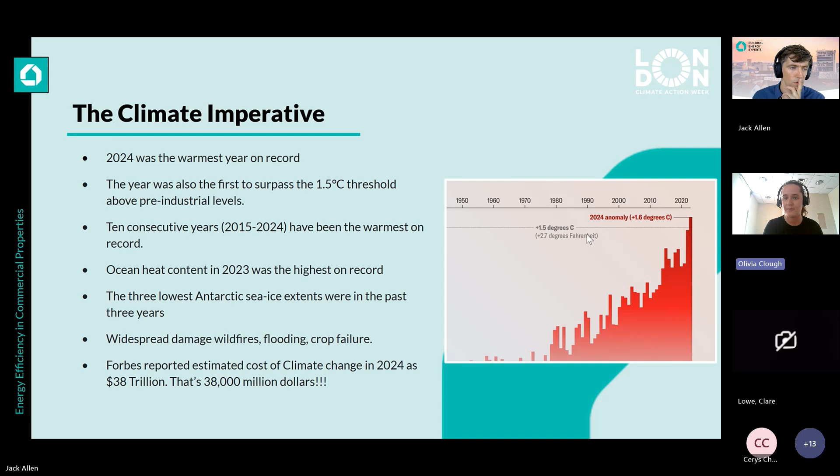Hi, Jack. Sorry to interrupt. I don't think the slides have changed on our end. If you want to just check. There we go. Oh, sorry. Got to click the buttons.

We're currently retrofitting 1 to 1.5% per year, and they're not necessarily being retrofitted to the correct energy targets. And this rate needs to reach 5% to meet the goals.

One of the key drivers, which will always be there, is regulatory compliance. The net zero emissions targets will presumably bring a lot more of these, although they have been light so far, especially as the last government were very slow to bring things in and change their mind a lot. But the minimum energy efficiency standards, which require buildings to be above an F or G, so a minimum of an E, are currently in place.

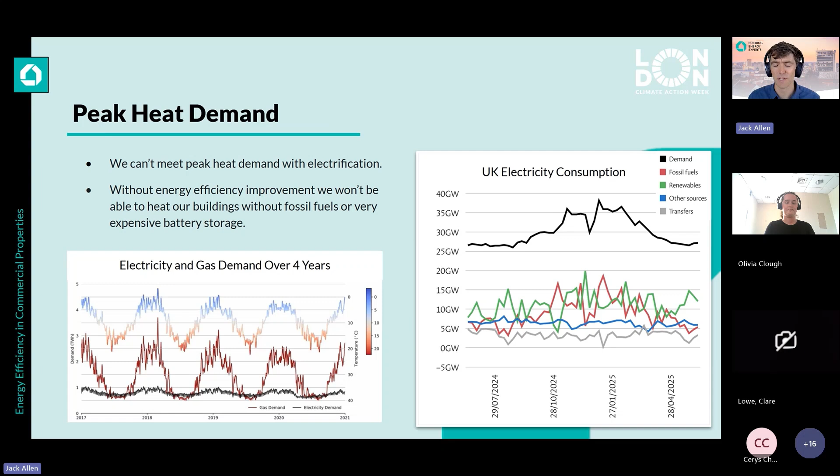Electricity, unfortunately, isn't like that, and the renewable generation doesn't follow our heating demand in any way. So without a cost prohibitive amount of battery storage, the only option with electrification is to significantly improve our energy efficiency in terms of being able to reach that peak heat demand in those cold winter months.

Apart from the practical and environmental imperatives, there's also a strong commercial case now for decarbonising buildings and making them more energy efficient. Starting with energy savings, since 2021, energy costs for businesses have gone up on an average of 90%. This translates to an overall average cost increase of 11%. With energy intensive businesses quite often working on very fine margins, this is a significant amount.

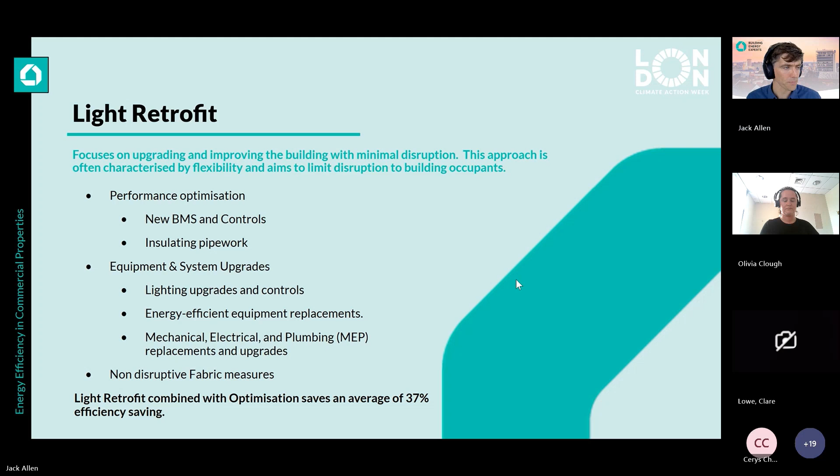Then we go on to deep retrofit. For further savings, deep retrofit is often required, particularly in older buildings with uninsulated building fabric. It involves making larger changes, such as potentially new facade, new openings, windows and doors, roof insulation, floor insulation. One key thing with deep retrofit is to consider it in line with your repairs and maintenance schedule. For instance, if the roof does need replacing because it's leaking, make sure that new roof that goes on is well insulated and has a PV array if possible. So combine it with the normal building cycle.

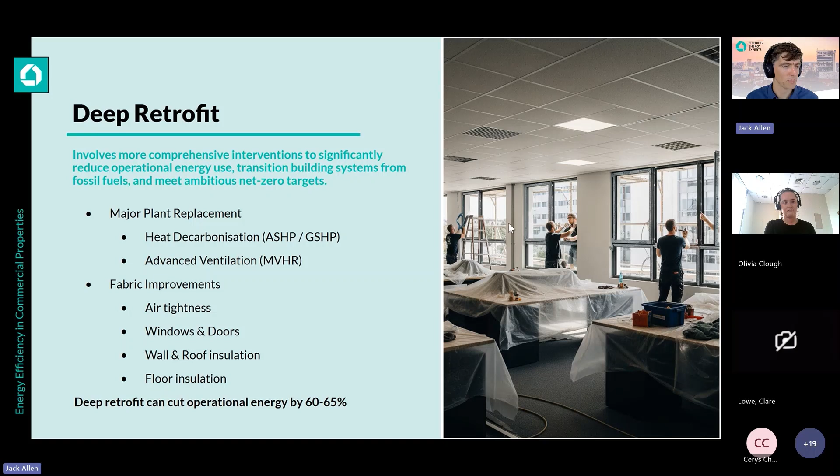The UK Green Building Council has got a good commercial guide for delivering net zero, and it sets out these 10 key considerations. It's a very good guide, and I recommend anyone downloads that or any of their other tools because they are an excellent organisation. I thought I'd add this in just because it's a great place to start. So first off, understanding the building, and that's getting a clear picture of how the building uses energy and what its current environmental impact is.

And then next up is figuring out what's needed. Do a thorough check of the building's structure, systems, and pinpoint specific areas for improvement. Then it's about building your case, thinking about how these upgrades will help with the new rules, and also if they can save you money or bring other benefits like making the building more attractive to rent.

Also knowing about the roadblocks and opportunities, being aware of potential challenges, like the split incentive, which is where landlords often pay for improvements because 85% of our building stock is rented out, and tenants typically get the benefit of those improvements. So how do you overcome that split incentive, and which part of the lease and who pays is one of the key roadblocks. So making sure that's worked out early is great.

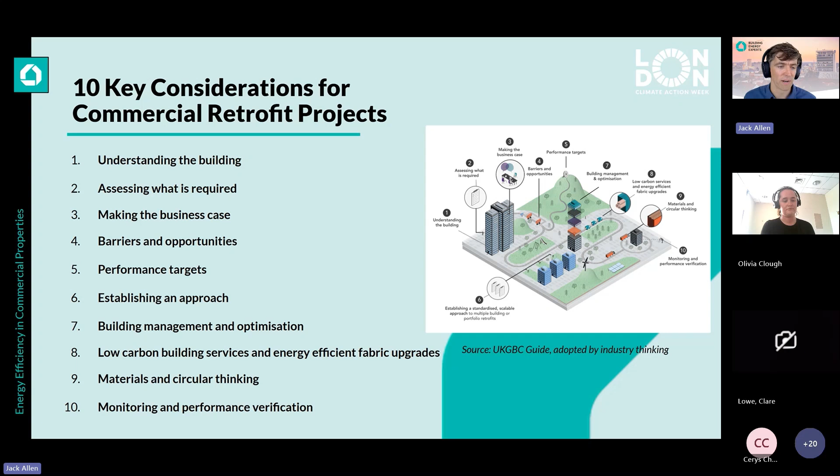Nine, think about materials. Choose materials that have lower embodied carbon, and consider reusing or recycling existing parts of the building if you can. And finally, and very importantly, monitoring, and keep monitoring after the upgrades to make sure you can measure and demonstrate the benefits of the retrofit. Takes us on to how to approach retrofit.

To really improve a building's energy use, you need to fully understand it. It's like a doctor doing a checkup before prescribing medicine. And what you need to do, essentially, and why it's so crucial, is you can't fix what you don't understand. If you don't know how much a building is using or why, you'll make bad choices. You've got to get the right information, look at the old energy bills, how many people use the building, and exactly how they use it.

Two buildings can be, on the face of it, exactly the same, but if they have a completely different occupancy pattern, like it's used in the evenings versus the mornings, then it can behave completely differently. Getting a professional opinion is key, and having experts do an energy audit and a full health check of the building to determine exactly how it's used and how the heating, cooling and ventilation systems all interact, and making sure they dig into the details, finding all the building manuals, reports and systems and making sure they're correct, not just using the sort of loose assumptions in the energy modelling software.

Also, there's often some natural advantages that buildings can use, such as using natural light rather than lighting, natural ventilation methods, and using the current materials on site where possible. Also, really key to identify initial measures and spot easy fixes first. Identify simple ways that save energy that really don't cost anything. There's always a few of those to spot in pretty much every building. And then follow a good plan and use existing frameworks that work well. PAS 2038, which we'll go on to discuss, is one of those frameworks. And there are other such frameworks and guides out there that can help.

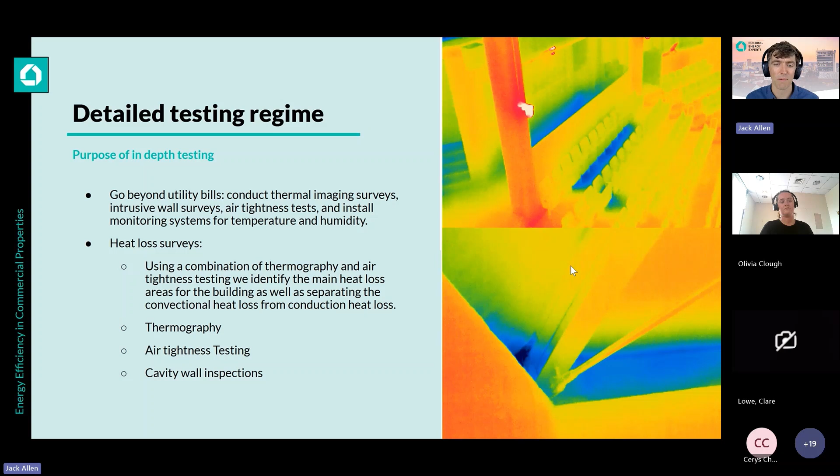So when we did an air test and used thermography, we saw that was really cold. They actually fixed both of these massive gaps. The air tightness came down to a good level, and their existing heating system was able to provide enough heat. So there's quite often small fixes or small individual building problems which would never be picked up by any sort of assumptions in a modelling software.

Once you've collected all of that, the raw data, and ideally more detailed data if you can, it's then important to analyze and model this using the correct and the best tools possible. Using the detailed information, we were able to produce more accurate modelling that results in more appropriate energy efficiency measures being specified, which should have less chance of there being a performance gap and better real world performance.

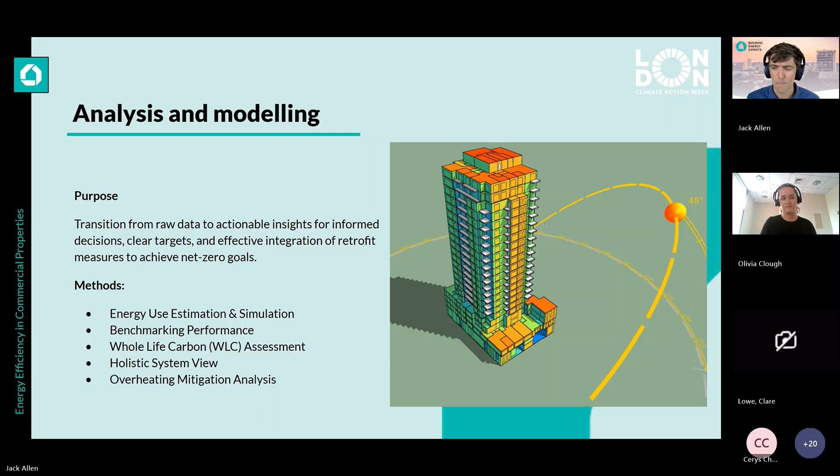Once you finish the energy modelling and the improvement option evaluation, and this isn't always a completely linear process, you're often going back and forward and working into the design stage and back. Developing a robust retrofit plan is the next stage, and it is the key process to progressing. Initially make sure you identify the quick wins, then the medium-term upgrades, and then the long-term interventions.

It's crucial that this plan works with the client to make sure you know their budgets, the current lease status and tenancy of the building, and when it is the correct time to implement each different improvement. The key elements of the plan are defining the performance targets, and then eliminating fossil fuels, which is obviously going to require building services upgrades if you're currently on gas, but also might require fabric upgrades to be able to deliver the correct temperature, and also make it feasible in terms of cost.

Overheating management through the process, advanced control systems, metering and monitoring strategy, always key. Moisture management, particularly if there are any ventilation changes and fabric changes, ensuring you consider how moisture works and how it goes through each of those building makeups, and you're not going to cause any interstitial damp or cold spots, is a really key element.

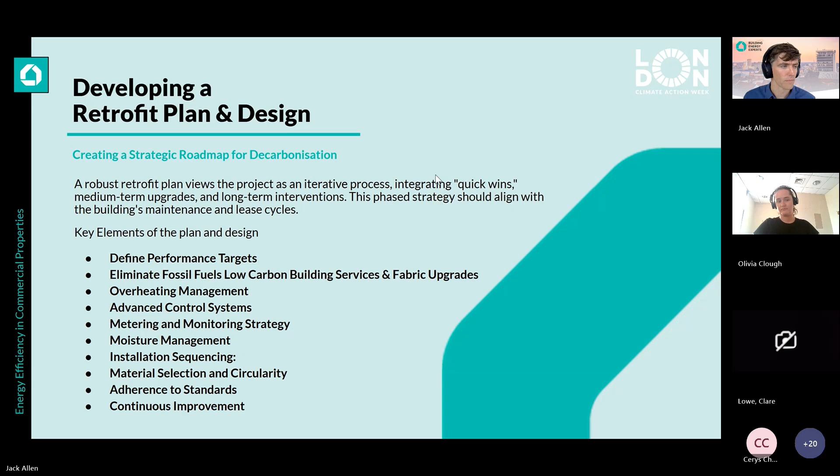There are several key benchmarking tools and assessment tools. Energy performance certificates, which get a lot of flack. If they're done correctly, they're not too bad. One of the main problems with them is they're not done very well. Quite often in commercial properties, the floor area will be out by 30, 40%. You wonder if anyone ever even went to the building, because it doesn't really reflect what you see when you go there. So basing it on energy performance certificates is fine, as long as you know it's being done properly and the information has been put in well.

They're developed by SBEM software, Simplified Building Energy Method. So they're not a bad tool, they're not the best tool, but it's one of the only standardized tools which goes across all commercial property. So it can be useful when used properly.

Next is display energy certificates. These actually measure the actual used energy per year in terms of gas and electricity. They're a requirement for all public sector buildings, so you'll see them on the way into schools and libraries, etc. But they're rarely used for commercial buildings. They are a good way to benchmark where your building stands, especially if there isn't a smart monitoring system in there already. It's also a good metric to improve upon.

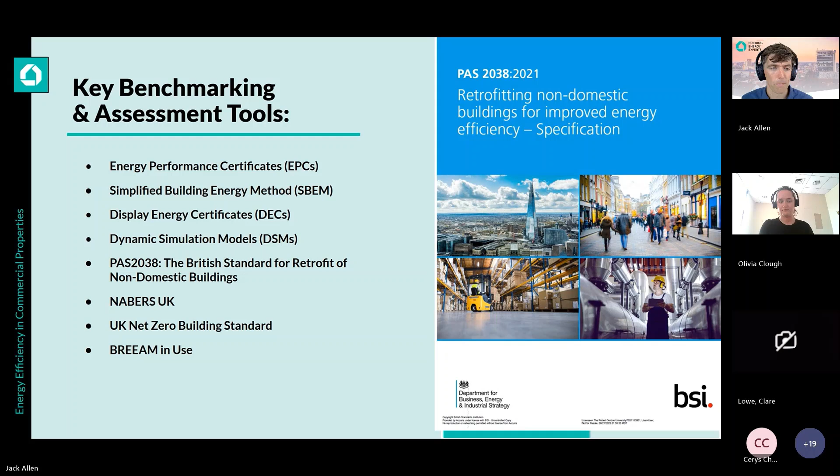So I just thought I'd go into a bit more detail on PAS 2038. It's like a really good instruction manual for making older commercial buildings much more energy efficient. It's designed to improve the energy efficiency whilst also avoiding any unintended consequences and ironing out any risks that might come from poorly thought out or poorly designed energy efficiency improvement, as well as improving the overall quality of the installation of the work.

Everybody needs to be certified to PAS 2030 to work on it, to make sure they've got the right qualifications and they're experienced, as well as reducing the environmental impact and improving the functionality of buildings, whilst also protecting the listed and heritage elements of that building.

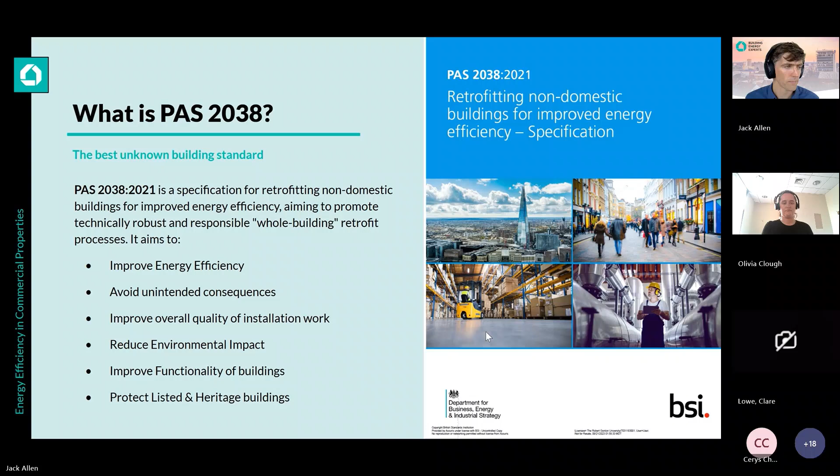A significant proportion of commercial emissions, more than a third, comes from the embodied carbon associated with construction and fit out. Therefore, for truly sustainable retrofit decisions, a whole life carbon assessment is essential. It enables you to consider everything that's already in that building and how it could best be reused before it's replaced with anything new. And also, if anything new is coming in, making the best decision about the lowest embodied carbon for those new systems or materials that you specify on that building.

The main one, probably, there's several really good examples of this, is reusing existing structures, particularly big concrete structures. Quite often we'll see this now, just buildings being stripped back to the concrete structure and then rebuilt. Ideally save more than that, but even if it's just saving the concrete structure, if it's structurally sound, will save thousands of tons of carbon.

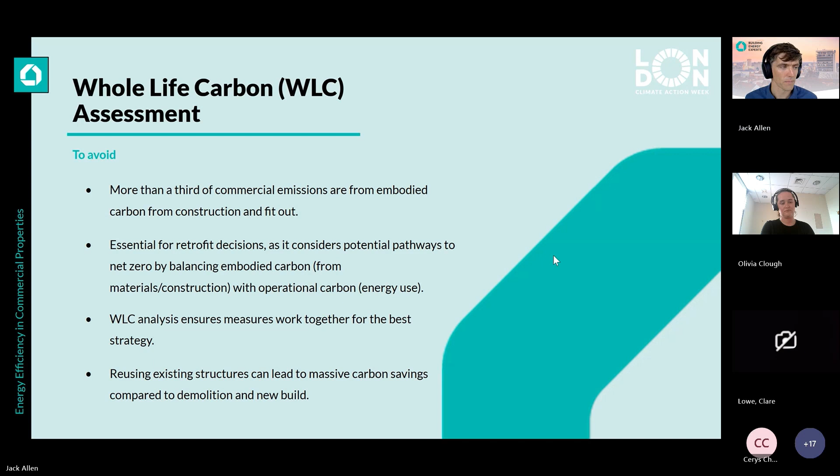Another key thing that's often not considered, particularly in a warming world, is overheating. As we make the buildings more energy efficient and we insulate them more, it's also key that we consider that overheating risk. We also declared a climate emergency, and part of that legislation, there's a legal requirement to consider the risk from the warming climate and produce mitigation strategies. And two of the main risks would be overheating and flooding for that.

Cooling demand is predicted to increase by 50% by 2030 over the 2004 baseline. Cooling is being put into more buildings, and the data shows that when cooling is in buildings, cooling just gets used. So often cooling will be on for sort of 10 months of the year, despite only really being needed for a few months, just because it's quite nice to sit in a constant temperature all year round, and the occupants don't know how to set the controls, or they haven't been set for them. So it results in a lot of extra energy being used.

There's a serious element to overheating. The most recent severe heat wave of 2022 caused 4,500 excess deaths. But there's also the loss of productivity and the risk to people with health concerns. It costs a lot of money to lose that productivity and have people trying to work in much too warm conditions.

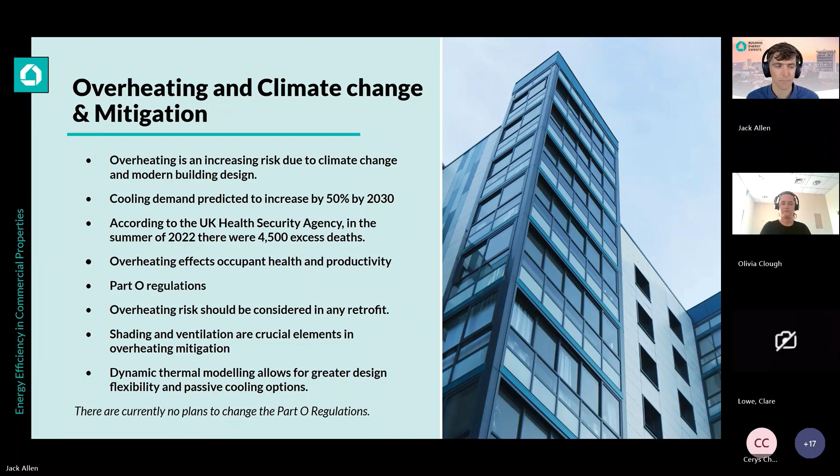When considering the cooling of the building, it's important to follow the cooling hierarchy, which I was alluding to just then. And the first element of that is eliminating unwanted solar gains. So effective shading strategies. It's not something we do very often in this country because we haven't really needed to, but it's something we need to think about more and more. If you go to Europe, you see shading on all buildings, and it's something that we used to have in the past before the advent of cheap cooling. So that's something we need to get back to.

Next is minimizing heat gains from the internal equipment as well as from heating systems, making sure all pipe work is insulated, etc. And then it's down to managing the heat well in the building using passive ventilation or mechanical ventilation techniques where possible. And the last resort should always be active cooling. There's going to be a lot more pressure on our grid for electrification of everything from vehicles to buildings. So we can do without the additional requirement of huge amounts of cooling where possible.

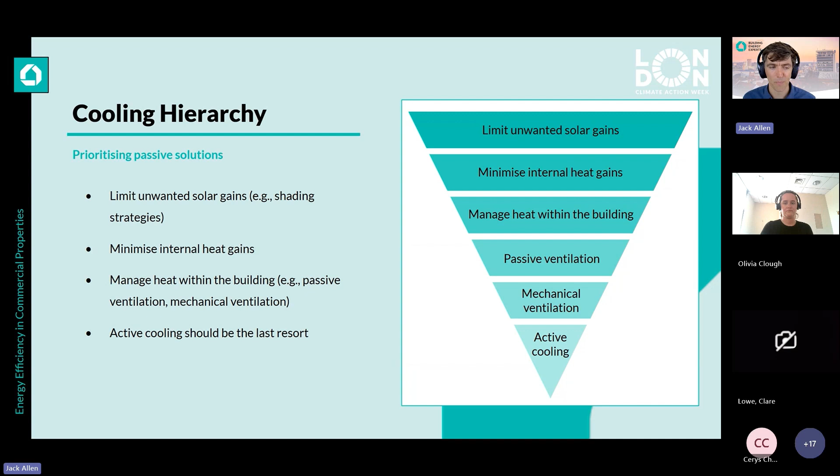Now we're going to go over a quick case study. This is about a health centre in Bristol. They have a goal to get to zero carbon as quickly as possible, and their boiler was reaching the end of its life, so they were considering a heat pump. But they got a quote for a heat pump, and it was around £500,000 versus new boilers, which were around £30,000, and they just didn't have the money to do the heat pumps. But they equally wanted to make the building as sustainable as possible and determine whether or not heat pumps would be possible for the future.

So we approached this by doing a PAS 2038 condition report, gathering all of the data from the site, as well as a commercial EPC to benchmark it, and gathering the energy use data. They only had annual energy use data. They didn't have it broken down any more than that, so we didn't get too much insight from that.

But then once we'd done that initial stage, we also commissioned further testing. We did a thermal imaging assessment, an air tightness test, and a cavity wall inspection, because there was very little data. There were no plans of how the building was built. Part of it was built in the late 50s, and then there was another extension in the 90s or early 90s, and we didn't know what was there. So we commissioned these further tests to find out more.

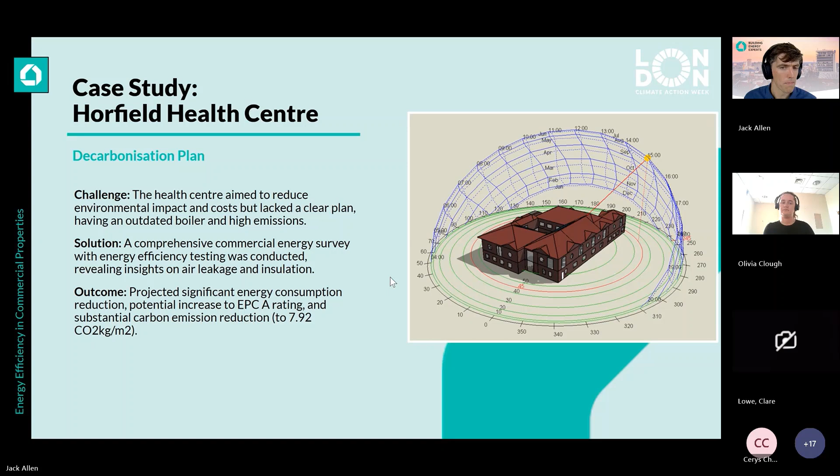Sorry, I didn't step onto that slide, so that's what that slide was.

And one of the interesting things we found was that the EPC, as stated on their EPC certificate on the government website, was C54, but it should have been an E106 if the person who'd done that original EPC had done it correctly, which is a massive gap. The floor area was completely wrong. They'd used a lot of assumptions and you sort of wonder if they'd been to the building really, because it was very badly done, which you find quite often.

The air tightness was over 25, which is enormous. They just had a false ceiling with hardly any insulation above it, just leading to the ventilated roof space. So despite taking two large fans with easily enough capacity to pressurize it, we couldn't even get it up to pressure to get a valid test. The result was showing around 28, which is like having a few huge windows open. So your heat is just going out, and the occupants had found that as well, because the upstairs occupants were too cold in the winter, and the downstairs ones were not finding it so bad.

We found the cavity was uninsulated and fairly clear, which was a good thing to find out from our cavity inspection. And through the thermal imaging, as well as some intrusive surveys and looking up in the roof, we found the loft insulation was sporadic and insufficient. It had been moved around to do some wiring and never put back, so large areas were completely missing. And there was also significant overheating risk in the south and west facing rooms, which was backed up by the feedback from the occupants as well, saying that those rooms were almost too hot to work in summer months.